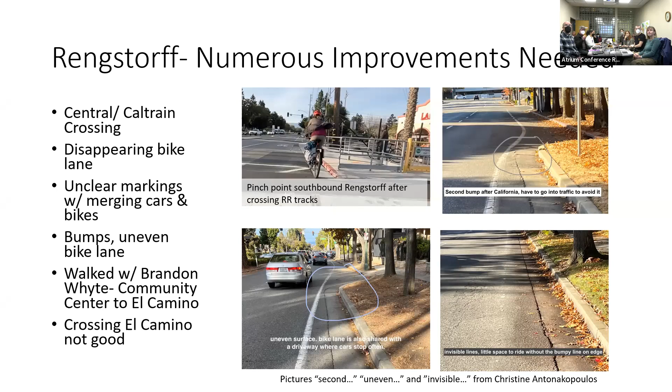Brandon was kind enough to set up a meeting with us where he walked through from the community center down to El Camino and Distel. There's a bunch of things, from the pinch point right after the railroad tracks to different kinds of surface imperfections. And the crossing at El Camino is not good. That's what we'll talk about a little bit more today.

I ride to El Camino, to Los Altos with my kids or meetings. My kids ride there most days, and I see a bunch of kids from the neighborhood riding there when I take my kids in the car.

So this is the path they take, going down, crossing over to the south sidewalk on El Camino Real on the east side of Distel Drive, which my son told me was the favored route, so people don't have to cross over Distel Drive and all the morning traffic.

There may be the 5150 development, which on the south El Camino may affect the south sidewalk, and the 2100 El Camino development may give us an opportunity, which we'll talk about in a little bit.

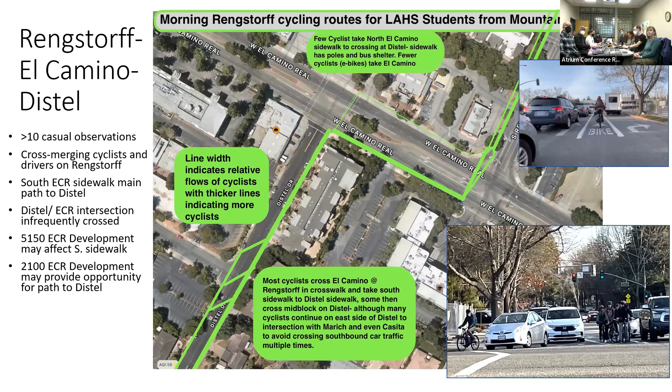After school is kind of the opposite direction, going north, except more kids in the afternoon cross over El Camino at Distel at that point because the light is quicker, according to my son.

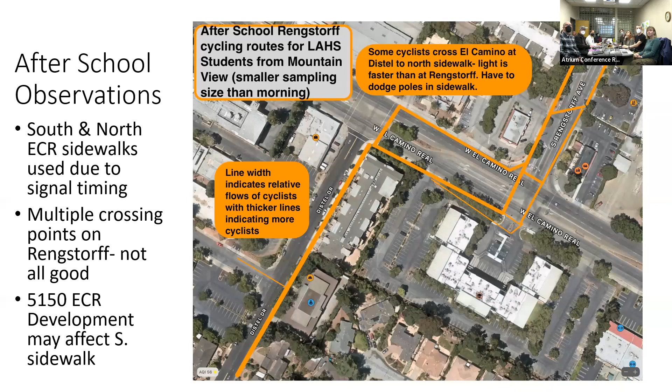So there's some upcoming opportunities and issues. The 2100 El Camino Real development may give us an opportunity to have a path around that property to go directly to Distel Drive.

So what I would like is to encourage y'all to keep your eyes out for these opportunities for improvement and continue working, and to thank you for that. So I'll turn it over now to Adit.

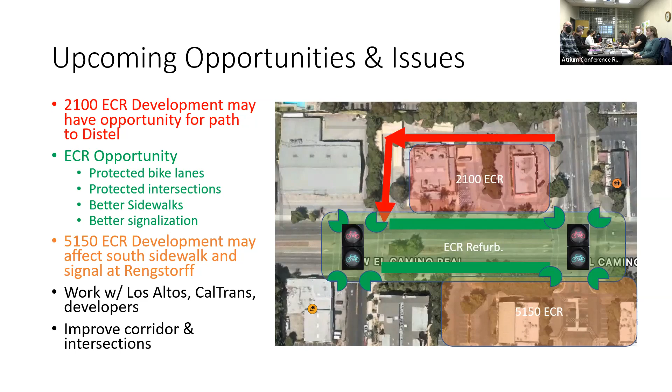And the other set of slides? Yes.

Hi, my name is Adit Chinthamadani, and I'm here on behalf of Los Altos High School Green Team, the Environmental Club, Transportation Project Group. In this presentation, I'm basically going to be expanding on John's comments.

As you can see, this is quite a big problem affecting a wide scope of students, because around half of LAHS students reside in North Mountain View. So many people are actually utilizing this El Camino and Rengstorff intersection in order to bike to school.

We conducted a student survey for Los Altos High School students who utilize this intersection. We solicited feedback from around 15 students, and essentially we had a few key findings.

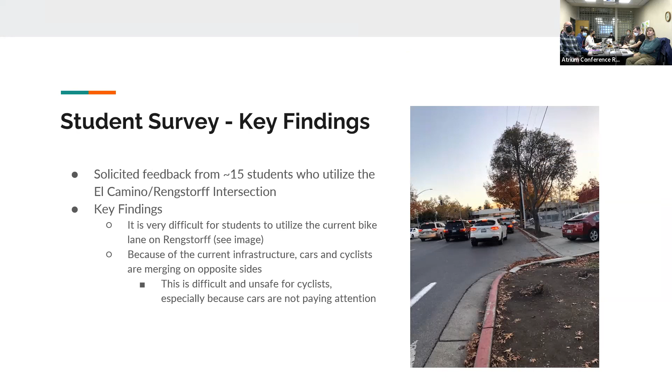Some more key findings in our survey. This is a compilation of 4 survey responses that highlight the main problems. Essentially, many of these findings echo what I've been saying. People don't really feel safe. People feel like the drivers are really not paying attention because of the current infrastructure, and people have had a few close encounters with cars.

So some suggestions echo what John was saying, in terms of adding a more distinct and wide bike lane so it's easier for cyclists to actually utilize it, or have some dividers similar to what's in front of Graham Middle School, which has some sort of stake-like dividers that divide the road and the bike lane. Those are some things that could be used to improve the experience of cyclists who utilize this bike lane.

That's just an overview from the student point of view. We'd also really appreciate some sort of alternate bike path, similar to what John outlined, that could directly access Distel, or just an improvement of current infrastructure. So thanks, thank you.

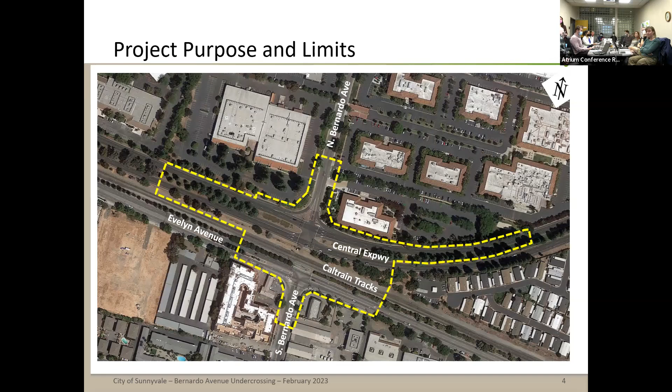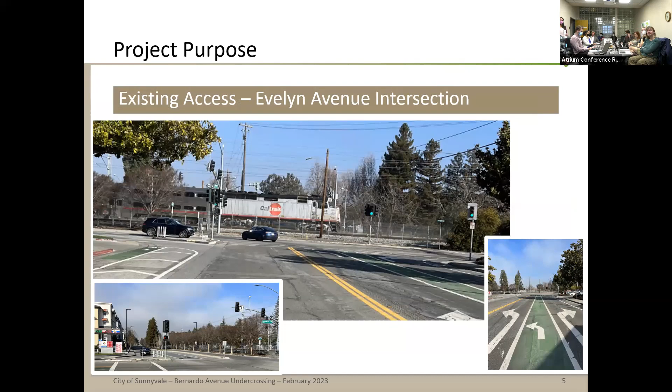So just a couple pictures here to show you what it looks like today. This is the view from South Bernardo, looking north, and you can see the train going in there - good timing on that photo. And these photos here are from North Bernardo looking south. So this is roughly where the undercrossing would connect on either side.

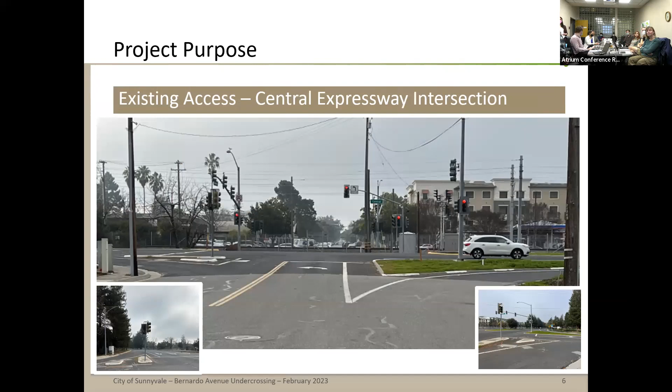So today, if you are a pedestrian or bicyclist, you have to go quite out of your way if you want to travel between the two - it's about 1.5 miles or more. It's a little farther for pedestrians because you can't walk on Central. So for a pedestrian, that's almost 30 minutes additional, and for a bicycle, that's almost 10 minutes additional. Most reasonable folks probably won't take that extra time - I think a lot of people will say, oh, I'm going to get in the car instead, which is not what we want to encourage. So that's really a main purpose for this project.

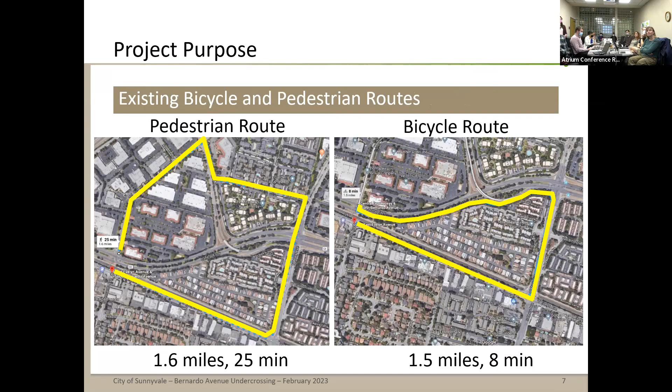So at the top of the screen, you'll see 5 different agencies are partners in this project. Being on the city limits, the southeastern corner is City of Sunnyvale, the other 3 quadrants are City of Mountain View. Right through the middle, where the Caltrain tracks are, between those orange lines, that's Caltrain right of way - it's their property, they own and operate that. And then Central Expressway is County of Santa Clara, and that little triangular piece on the side is also County of Santa Clara.

Additionally, we're partners with VTA. They've provided us with some funding, and they're also helping us with project management activities.

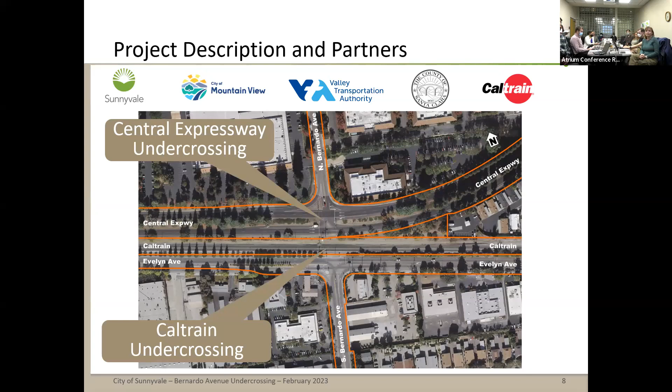So work performed to date, just to get you up to speed - we started this project in about 2018, brought in WMH, and Dave got started on the project. Cities of Sunnyvale and Mountain View signed a funding agreement, so we're equally participating in the preparation of the current scope. The current scope is looking at developing conceptual designs and environmental clearance - we're not yet at final design or construction phase, just trying to get through our environmental clearances at this point. But we do have Measure B funding that we received from VTA to help us with the final design, so we're ready to go when we get our clearance.

So as I mentioned, when the consultant team came on board, they immediately started working on some conceptual options and developed a whole broad range of different variations. In December of 2020, we had a joint BPAC meeting with both Sunnyvale and Mountain View BPACs and presented that variety, got your feedback, and brought that back to the team, starting some revisions based on that feedback.

In the meantime, Caltrain, also in 2020, started to put together their rail corridor use policy - they call it RCUP for short. We like our acronyms. They put together this policy to help inform and move projects through the Caltrain corridor and process, specifically for projects that are not rail projects. Our project, as a bike and pedestrian undercrossing, falls into that category. We went through a process with them, and the Joint Powers Board of Caltrain approved a use variance, which means they will allow us to move forward with our project and help us with the project administration.

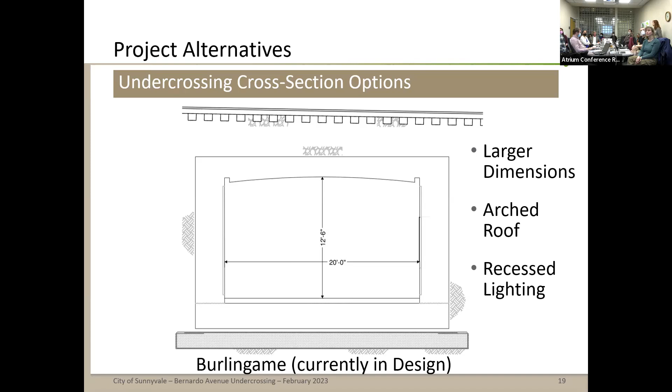Next slide, please. I wanted to run through a few of these other undercrossings, some of the feedback we received, and some of the concepts we're contemplating integrating into this project, along with dimensions on those undercrossings.

It also has light inside, which could be because of the arched roof. I wanted to point out that if you're familiar with this station, this is very similar to the length of the Bernardo undercrossing, and also midway it has some natural light in there. So it's also kind of very similar to the proposed eastern Bernardo undercrossing concept.

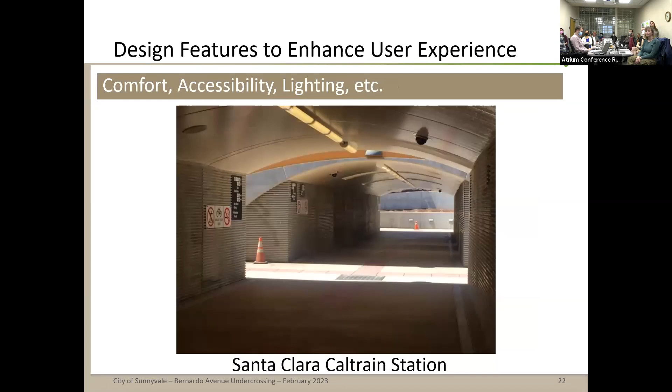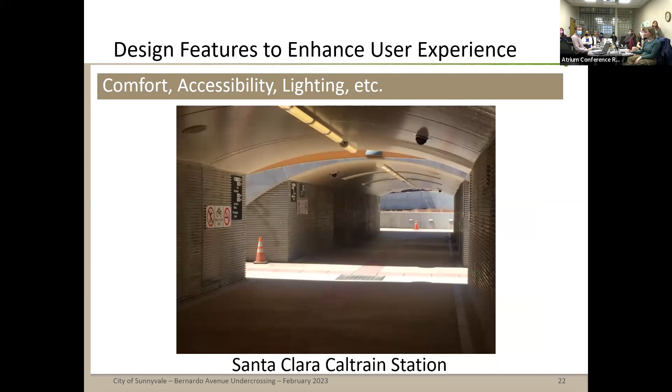Next slide, please. This is what it looks like on the inside. In fact, the opening on the Bernardo eastern alternative is even larger than that. But again, you get a nice feel. You don't feel as much like you're in a big, long tunnel, if you will.

Next slide, please. Lastly for this one, just things that we think would help the experience, like you can see the mirrors in there. Another thing about this undercrossing that's sort of similar to Bernardo is we have those ramps coming in at right angles. It's very hard to see around that corner. So at a minimum, we're going to likely want to have some mirrors in there and some things so you can see if a cyclist is coming from around the corner. Those are other things that we'll be looking at.

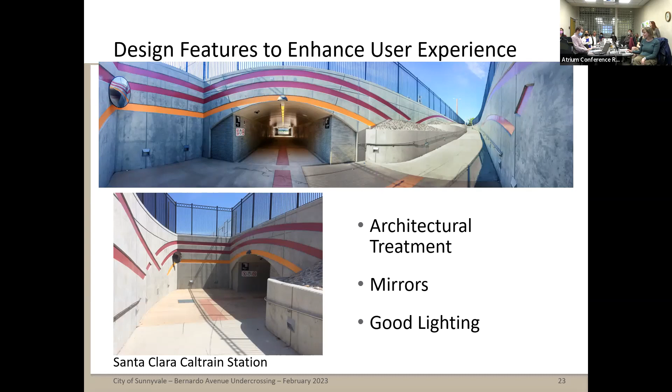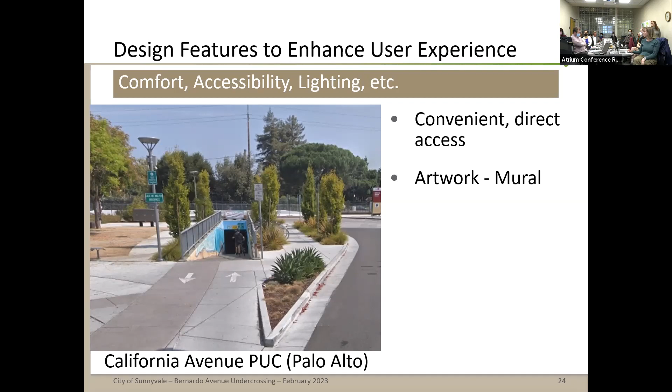Next slide, please. But they absolutely love the mural and things you can do to make it feel better when you're traveling through these. Next, please.

Here's Homer Avenue in Palo Alto. This undercrossing is 18 feet wide and 8 feet 3 inches tall. People do like it because it's wide and it's got good lighting. They also like the separation of bicycles and pedestrians in this, which is something that we're thinking about as well.

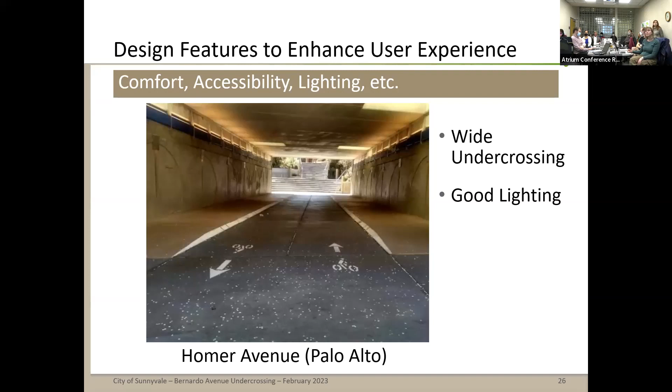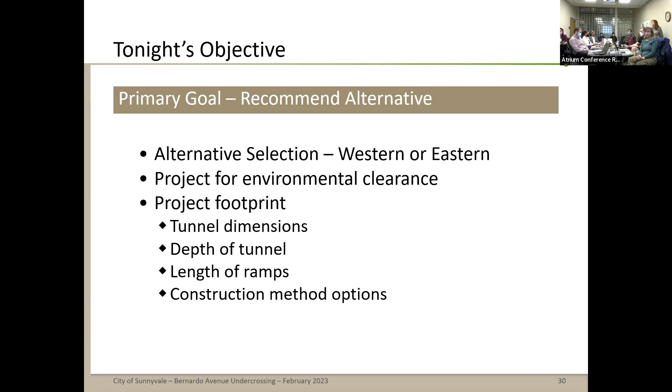So where do we go from here? As I mentioned, we went to the community at the beginning of the month. We're here tonight with you. In March, we will be giving the same presentation to the Sunnyvale BPAC, getting their feedback and their recommendation to councils. Then in late March and early April, or mid-April, we will be coming back to Mountain View.

To the Council Transportation Committee with a public hearing item and asking them to make an action. That action will then be forwarded on to the full city council. And finally, in May, we will be going to the Sunnyvale City Council and getting their action as well. So the hope is by May, we will have a recommendation, we'll move forward, and Dave and his team can finish up the environmental clearance.

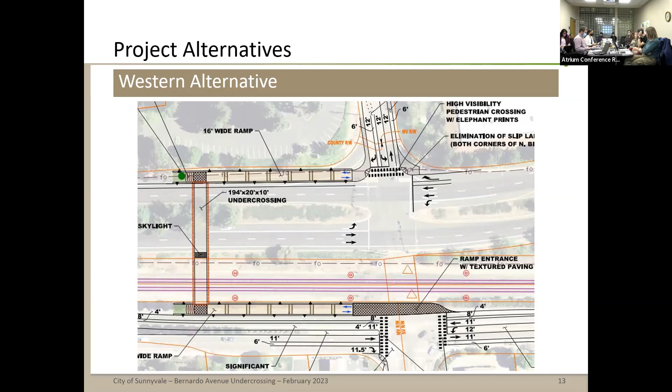Great, so that answers my question - that project is going forward regardless of what happens here. Yes. Okay, great. And then my other question is, when we talked about those bonus ramps into Central Expressway, do you know what the speed limit is around there?

I think it's 55, I think it's 50, it's at least 50 here. Okay, thank you. Some places it varies, it's 35, 45, 55. Yeah, I actually just came up here on Central Expressway this evening and drove through here, and I'm pretty sure it's 50 here. And this is the last intersection right before Mary Avenue, correct? Which has got a lot of other ramps as well.

So, one additional question. I didn't see any data about the current or expected residents and employees at each quadrant, as it were, the flow estimates of who might use it, what direction would be coming from south along Bernardo in the morning or afternoon on each crossing. Do we have any information about that?

So we started this project before those other projects, I believe, had developed any projections. I'm not sure how it all worked together, but I guess within a 2 or 3 mile radius there's tens of thousands of residents. I can get the number, but the East Whisman Precise Plan plans for large increases in employment and also housing in this area. I guess I was trying to understand what morning and afternoon flows might look like and favor one configuration over the other.

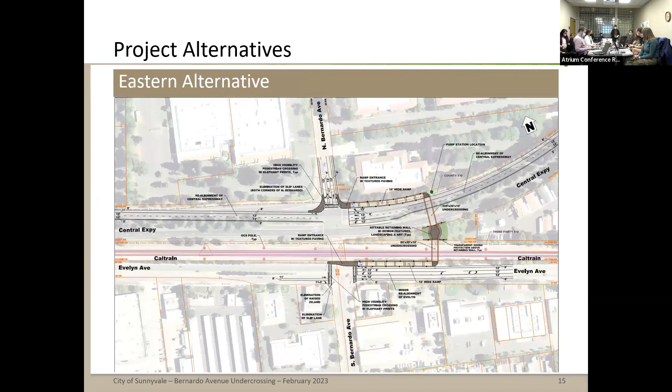And I think the one that you showed at Santa Clara, with the more arch-like roof, feels more sturdy to me, more welcoming, and yeah, wide, light arch on each side. Sounds good, thanks. Thank you.

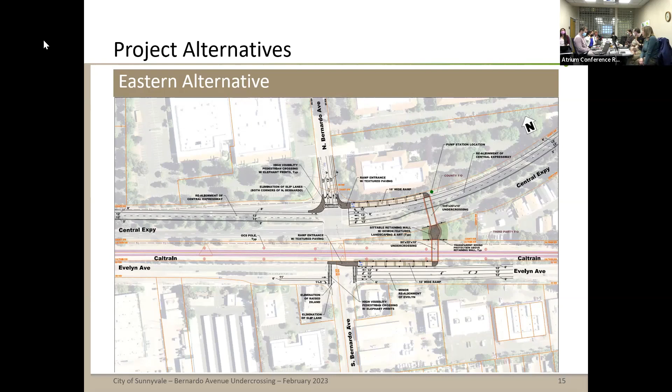Like multiple other members, I have trouble expressing a strong preference about Eastern versus Western. I have a slight preference for Eastern basically because I saw the exact same thing that Isaac did. I actually currently commute to an office on California Avenue in Sunnyvale, and being able to cross the train tracks at this location instead of crossing at Mary would be much safer, even though I don't need to cross Central Expressway. And so if there were through access through the mobile home park to California Avenue and crossing Mary at California Avenue, that would be nice. But that's sort of a long-term view. That slightly tips the scale in favor of Eastern for me, along with I do like having the light. And if the two projects are comparable costs with comparable timelines, then only small things are tipping the scales.

With regards to bike access to eastbound Central Expressway, I'm not a huge fan of the reasons being listed for not doing it, because I think long-term we should be asking how can we make Central Expressway a more useful bicycle corridor, rather than saying it's not useful right now so we shouldn't do anything. However, I don't think it serves very many trips to do that, and it looks like a somewhat expensive addition, although maybe not horrendously expensive. So it doesn't seem like that high of a priority to me, and I'm perfectly happy preserving that funding and political will for other battles.

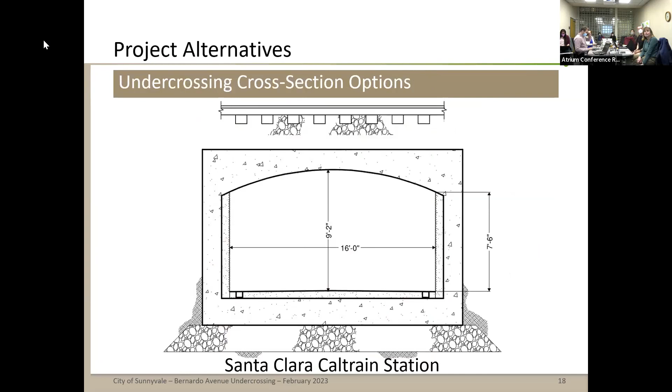In the meantime, any other comments? Member Fenwick? So can we go back to the photo diagram? I think your first slide before all the alternatives. Before the alternative. This one, yes. Okay.

I think we're seeing the mobile home park and all the one or two story buildings. So the question is, is there a process to look at enhanced alternatives that might capture right-of-way during development and log that, whether it's ten years down the road or whatever, that those buildings get torn down and parking lots developed? So the property on the northeast side is going through a development process right now, and that building is staying as part of it. They have a transfer of development rights agreement with the school district, so that building at the corner there is staying.

But in general, I guess the question is, how do we account for alternatives where, let's say, this project feeding into the tunnel or adding a second tunnel could benefit from right-of-way access on developments in the area—both to suggest options as we look at the design, and to remember to negotiate it when it comes up. I think that the design that comes out of this is what we would use to require or request things from developers. So if it's not in the design, then we don't have a basis for it.

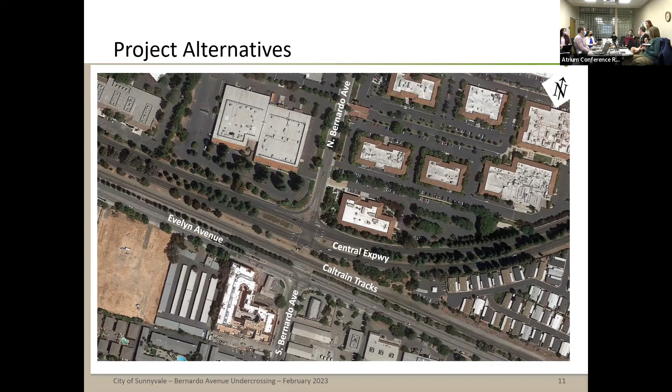Since we're already a bit behind where we intended to be, I think a motion would be in order for our preferred alternative. We need a motion? Please. I would like to move that we go forward with the eastern alternative as presented at BPAC. Second that motion.

Roll call vote, or just ask everyone to raise their hands? Yeah, I guess we can do that. Okay, all in favor? Aye. Aye. All opposed? Any abstaining? All right, that was 4 in favor with member Dominic abstaining.

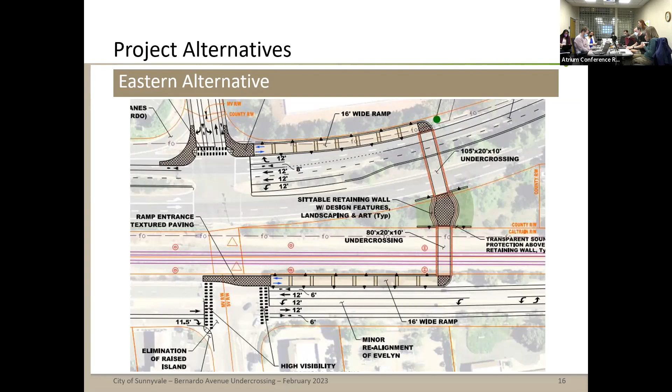Okay, we will now move to item 6.3, our Vision Zero Action Plan and Local Road Safety Plan. And I believe we get to hear from a repeat presenter.

Tracy, you're going to share from your computer? Thank you. Thank you for joining us. Have a safe drive home. Yes, nice to meet you too. If you want to stay over there, Tracy, I think it would be okay, but you can come here too. If I could come over there. You got it. One more.

Where are these pastries from? They're from the Midwife and the Baker, my favorite bakery. Usually I can't get there in time, but I got them before work today. What's in them? These ones are vegan cookies, and then that's an everything croissant.

And Corinna is on the line. For this item, the project manager is Priyoti Ahmed, one of our transportation planners. Unfortunately he's sick tonight, so Tracy has offered to do the presentation for this one as well. My colleague Corinna is also on the line for the public comment and questions period in case we need her to provide input.

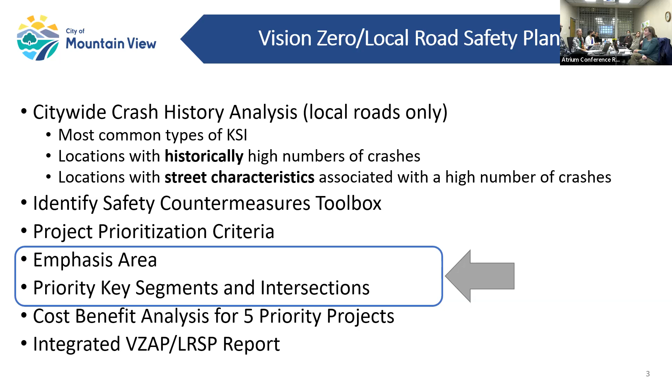As a reminder, this project started with a crash history analysis. Because the project started in 2020, the data we looked at was from 2014 to 2019. As someone noted in a question prior to the meeting, that does not include crashes or incidents that have occurred from 2020 through today. Some of that information wouldn't be available in the data set we'd be pulling from, but we started the project a couple of years ago.

The total number of crashes from 2014 to 2019 was just over 1,200, with 77 of those being fatal and severe injury crashes. One important thing to note: looking at the data by mode, there's a disproportionate representation of bicycle and pedestrian injury crashes, particularly in relation to their proportion of mode share within the street.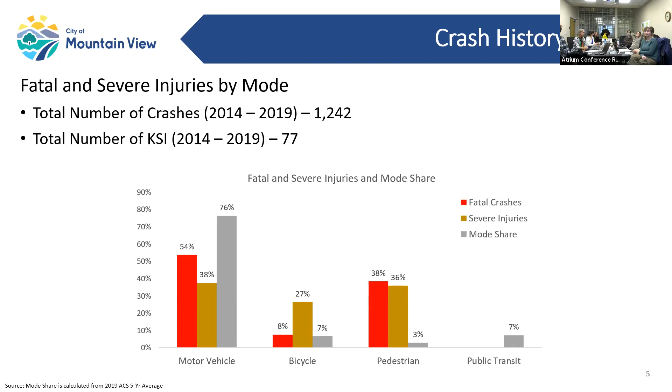Some other findings from the crash analysis: we saw higher fatal and severe injury collisions at street segments that are 35 miles an hour or above. This represents approximately 20% of Mountain View streets, but they account for 73% of fatal and severe injury crashes. We also noted fatal and severe injury crashes occurring at intersections of 25 mile per hour streets with those 35 mile per hour streets, and it's important to note the collinearity between posted speed limit and other roadway factors. We also noted a large number of crashes occurring in commercial areas and precise plan areas.

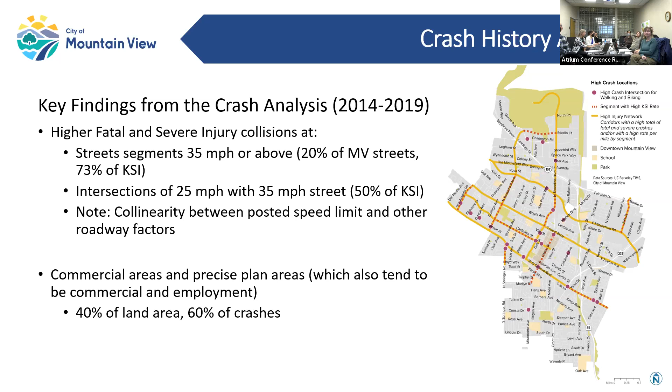Based on what we saw in the crash history, roadway characteristics, and crash types, we developed this countermeasure toolbox using recommended proven safety countermeasures from FHWA and Caltrans, pulling from research and documentation. Proven safety countermeasures identified by those agencies are important when putting forth projects for funding. Typically these countermeasures fall under pedestrian improvements, bicycle improvements, and other multimodal improvements, and they are effective at helping improve safety for those different modes.

For pedestrian improvements, we considered leading pedestrian intervals, protected left turns, high visibility crosswalks, curb extensions, mid-block crossing islands, RRFBs, and access management. Again, a similar slate of countermeasures, and many of these are already in use in Mountain View and the Bay Area, which was also an important feature.

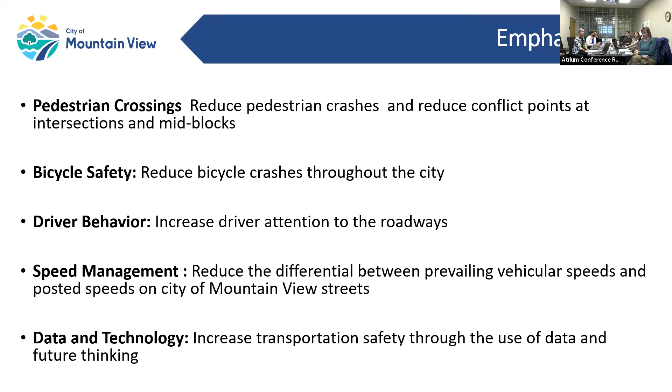Looking at speed management approaches, and then a focus on data and technology, increasing transportation safety through the use of data and future thinking—partly identifying where we're missing data, and whether there are technologies we can get or support to improve safety going forward. These emphasis areas in the crash history also help inform the prioritization criteria used to rank and prioritize the projects. Top of mind and the highest priority was a focus on reducing the severity of crashes.

Next was again this idea of looking at the equity component, looking at income and the vulnerable road users affected in crashes, proximity to key destinations in terms of where the crash locations are, or the road characteristics that may be associated with the risk of a crash. We applied those three elements in the first layer of the prioritization criteria, and then when we move into the more final stages of prioritization, we look at proven effectiveness and implementation, coming down to a final list of 5 projects that we'll put the cost analysis together for as part of this plan.

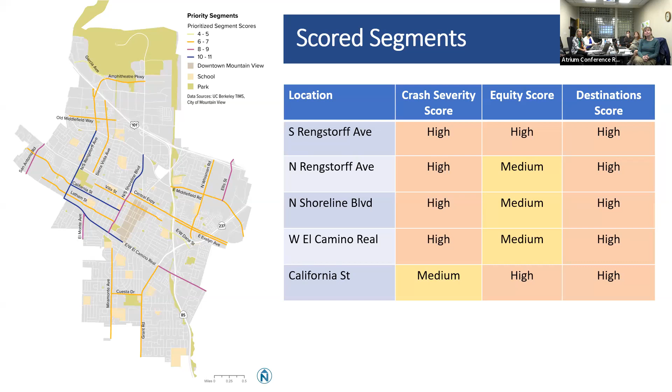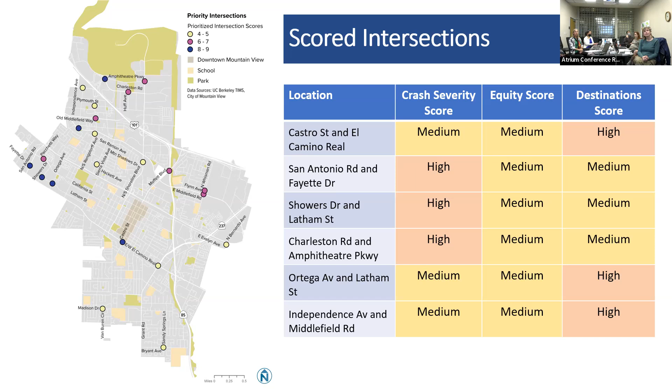When we look at the intersections that had crash history or characteristics associated with crashes, again looking at these top 3 scoring prioritization criteria, we're looking at 6 intersections, and 3 scored high and 3 scored medium in terms of crash severity. They all scored medium on the equity score, and again an even split between high and medium for the destination scores.

So again, our early list included more key segments than was on that shorter table we just went through. One of the things we looked at was what projects are already planned and scheduled within the city's CIP. So while some of these projects did score high, if there are things already underway, they were pulled off the list. They're already in a plan and they are moving forward.

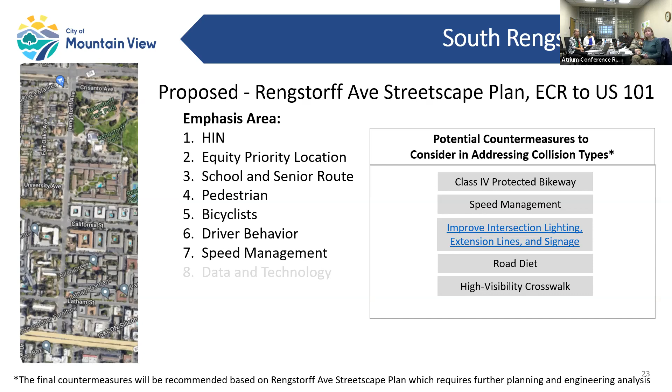The countermeasure list again focuses on infrastructure changes, but as I mentioned earlier, one of the key items about the emphasis areas is it also allows us the opportunity to look at non-infrastructure programmatic elements. So some potential countermeasures to address the collision types seen in this section of Rengstorff: Class 4 protected bikeway, speed management, opportunities to improve intersection lighting, extension lines and signage, consideration of a road diet, and high visibility crosswalk.

When we look at North Rengstorff Avenue, again, very similar in terms of the list of potential countermeasures that would address the collision types we're seeing along this section of the roadway.

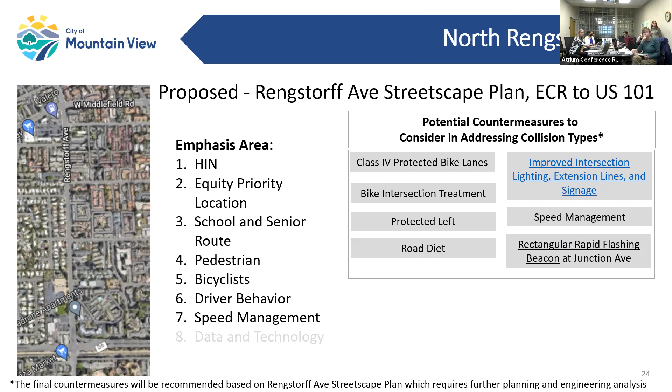And then again, along another section of North Rengstorff Avenue: improvements in crosswalks, bike infrastructure, and awareness of crossings for pedestrians, and then the potential opportunity for a road diet.

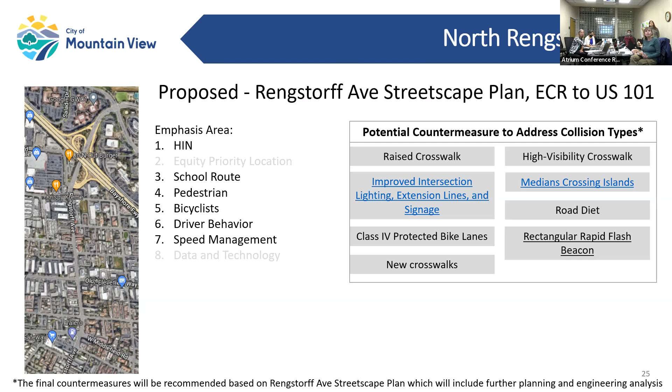San Antonio Complete Streets is another potential segment project to be considered moving forward in this plan. It also has a range of potential countermeasures that could be applied to address the collision types we're seeing, or address the roadway characteristics that occur on this segment.

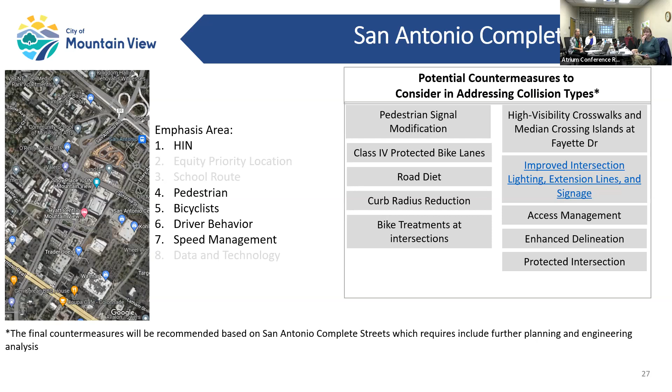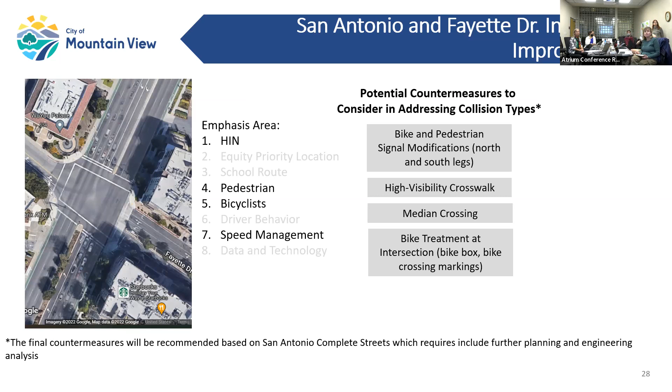We have a number of intersections that came to the top of the list that could be considered as intersection projects, to move forward towards a more concept-level plan and cost estimation to be included in the plan. San Antonio and Fayette Drive intersection improvements could include bike and pedestrian signal modifications on the north and south legs, a high visibility crosswalk, a median crossing, and potentially bike treatments at the intersection.

At California Street and Pacchetti, we could consider pedestrian signal modifications, high visibility crosswalks, a median crossing on California, looking at some curb radius reduction because of the greater curb radii, and an opportunity for some bike signal phasing and treatment at the intersection.

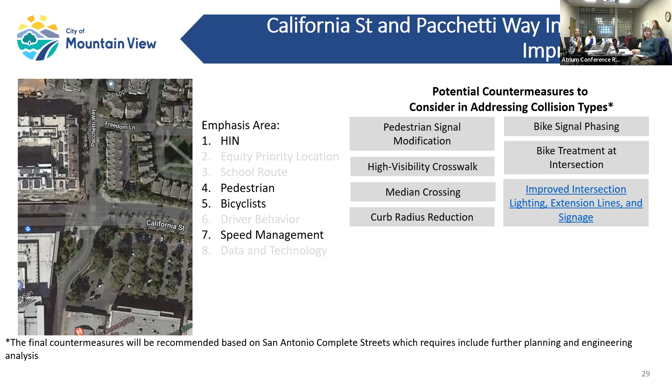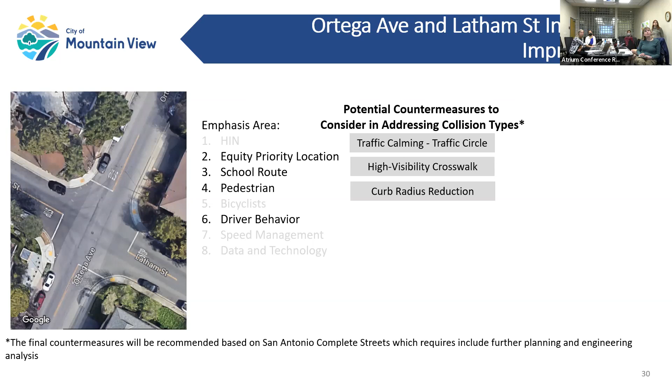Looking at Ortega and Latham intersection improvements, there could be an opportunity for traffic calming or a traffic circle, increasing the visibility of the crosswalks, and again those are some pretty wide curbs, so can we tighten those up to reduce the speed at which vehicles could take those corners?

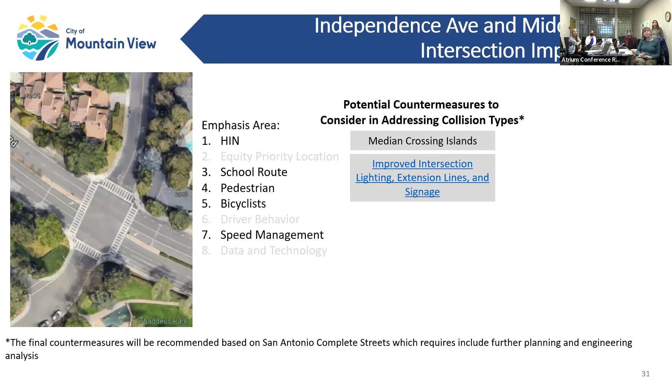And then Independence Avenue and Middlefield Road could consider some median crossing islands, and then improve intersection lighting, extension lines, and signage.

So those are all design approaches that could be applied to both segments and intersections. There are also potential operational improvements that could be considered to be applied in locations or systemically throughout the city. One of the things we've talked about is reducing the approaching speed and increasing visibility.

We could look at no right turn on red, leading pedestrian intervals, wayfinding signage, and then there are also opportunities in the California Vehicle Code and California MUTCD in terms of locations where the speed limits can be reduced.

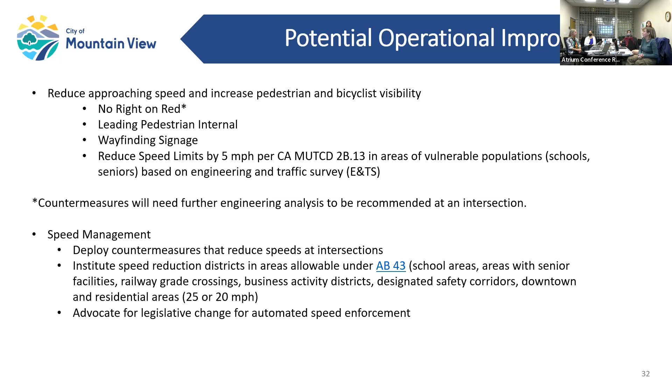Related to speed management, there are opportunities to apply countermeasures that reduce speeds at intersections, and what is available in terms of using changes in state law to potentially have speed reduction districts considered in various places around the city. There are always things happening at the state level in terms of legislative change. Automated speed enforcement is something that comes up often for consideration, and that is something that could be advocated for at the state level as well, to allow agencies the opportunity to utilize that tool.

So our next steps: we presented this analysis to the Vision Zero Working Group about a week and a half ago, and we're here presenting to you tonight. Community outreach will be done in March, and then our intention is that the plan will go to CTC.

So for all of you, the discussion questions for this evening: does BPAC concur with the prioritized key segments and intersections, and do you have input on the proposed project descriptions that were included in them? And that's it. Thank you.

Thank you. Questions? Member Fenwick. I have a clarifying question, I sent it, but I'm not really sure.

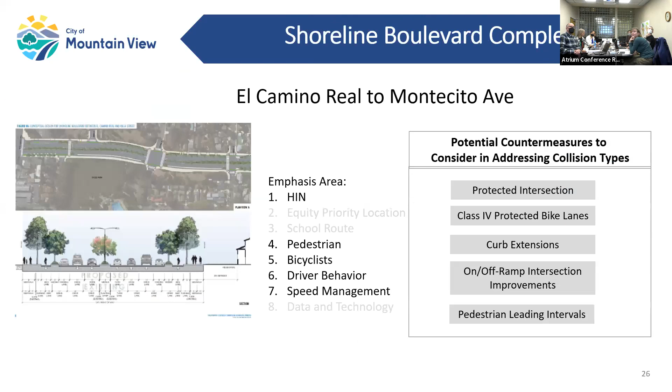That was a response to a question you submitted. Sorry, maybe Priyati had already provided that. Moffett and Central Expressway. Yes, so we have a planned project to do a signal improvement at that location, including conversion to an 8-phase signal. Okay.

Additional questions? Okay, I guess I will move to public comment for this item, but seeing no members of the public present, we will continue on to member comments, and if you could put up the two discussion items, I think that would help.

Would anyone like to begin? A lot, but. Vice Chair Stone. So I want to talk for a little bit about a few specific projects. First off, I want to say that I really like the report. I think it's very good, and the identification of Rengstorff as a priority is something I agree with, and we've heard another potential reason to favor that. So my first comment is that

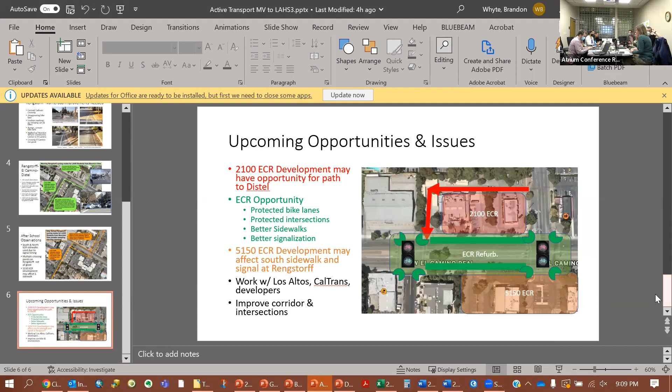Overall, I think I like the analysis and the plan. I agree on Rengstorff. It's a street I would find myself on every once in a while because I have to cross the tracks, and I'd think, oh my gosh, what is this? I'd maybe file an Ask Mountain View ticket and decide not to go back. Then it turned out lots of school kids are using it. I couldn't believe it. That seems like a definite priority.

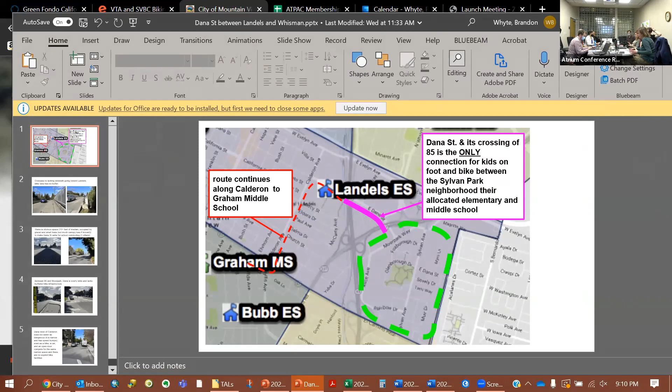I had thought about Old Middlefield, because I'm seeing Shoreline getting a lot of attention, and I'm like, well, that stretch from El Camino to Montecito has already been treated. So we're going back and doing more on Shoreline—do we really need to? Then I looked at the nice new map with collisions from 2019 or 2018 to today, and they're still happening on Shoreline. So okay, maybe we should go back and do more there because that's where the collisions are.

But as Member Stone mentioned, not in this meeting but a previous one when we looked at collision data, we don't really have the denominator. So on Old Middlefield, maybe not much is happening there, but there's no bike infrastructure. Do we weigh more heavily on roads where people currently are, maybe because we have inferior bike infrastructure but at least there's something, so you find people there, and we want to make that better? Or do we want to address places like Old Middlefield where there's really nothing, where you wouldn't even go?

Maybe this segues into Dana Street, which didn't make it into the top 5, but I wanted to make a pitch for it. In green is the Sylvan Park neighborhood, allocated to Landels for elementary and Graham for middle school. On Dana Street, kids have to cross 237 and 85—it's the only way. My son used to go to Landels, and I talked with other parents; they would just drive, even though it would be a relatively straightforward walk or bike, because you don't want to do that on the sidewalk with elementary school kids.

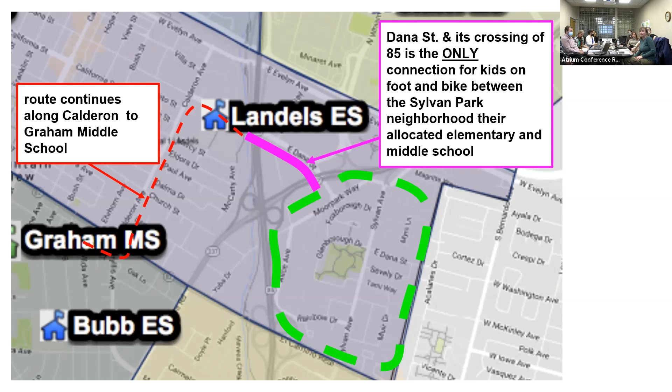I know a kid who did do that with his parents, and now he's biking to Graham, fortunately using the Calderon part. But again, with Dana Street, I think their hangout time is impeded because I'm not confident sending my son across Dana to get to the Sylvan Park neighborhood. So there's a missing connection, and even though fortunately we haven't seen many injuries there, I think it's a very strong missing link. Maybe next slide.

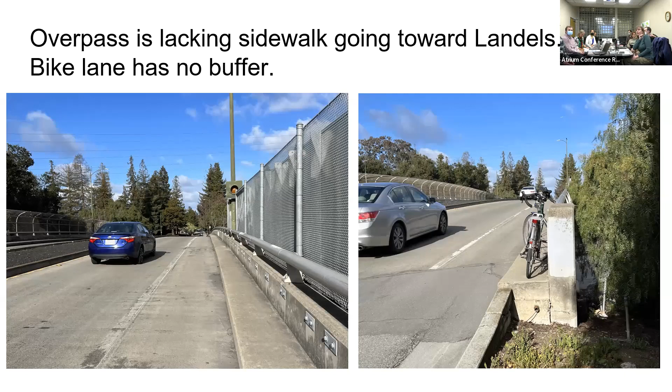So this is going toward Landels from the Sylvan Park neighborhood. There's no sidewalk on that side, and there's no buffer in the bike lane. So I think that families would not feel comfortable going there. Next slide. But maybe I'm missing something. There seems to be a huge opportunity in terms of just nothingness, like this super wide median. I don't know how wide it is. I think it's at least 10 feet. And then at the end, you have some smaller trees, so I think it wouldn't be a big loss of canopy. And while I was there taking photos this morning, there were a bunch of bikes going. I wasn't there during school commute time.

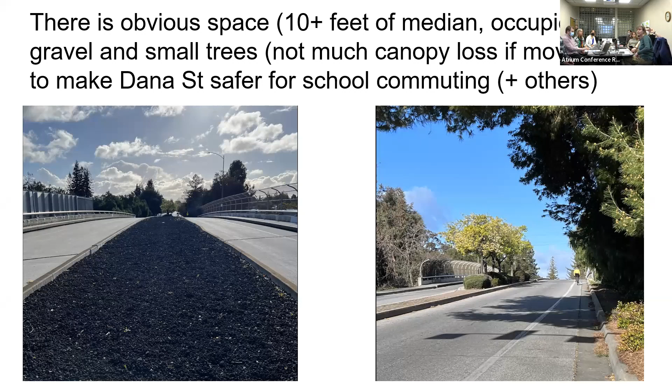Next slide. And then the next section, I think, is also a great candidate because it's just a wide road. The speed limit is, I don't know, cars tend to drive pretty fast because it's pretty wide. And then there's that weird thing where there's a very skinny bike lane next to a skinny lane, so you're kind of pressed against the cars.

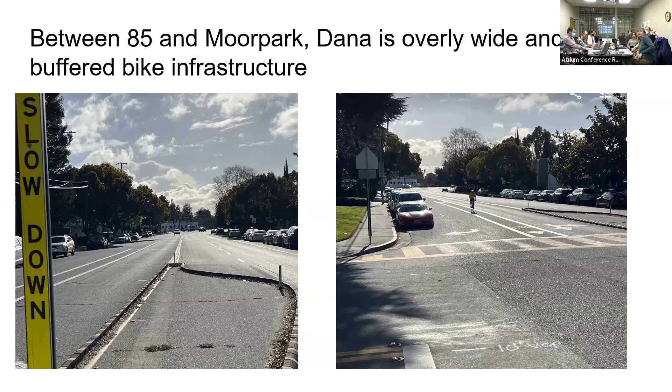Oh, I had more to say. Okay, and then this is just a contrast with Dana further, where it's like, oh my gosh, there's a person opening their van door, there's a car, there's a bike, and they're all supposed to be in the same space. But because the street is narrow and there's speed bumps and so on, I wasn't thinking something bad's gonna happen. So for some of the other projects, I'm not as sure about what needs to happen, and I guess I'm not an engineer, but it seems like for Dana Street, there's a lot of opportunity there to connect kids with their school and with their friends.

Yeah, that's it. And then, sorry, I had notes. I have one more to see.

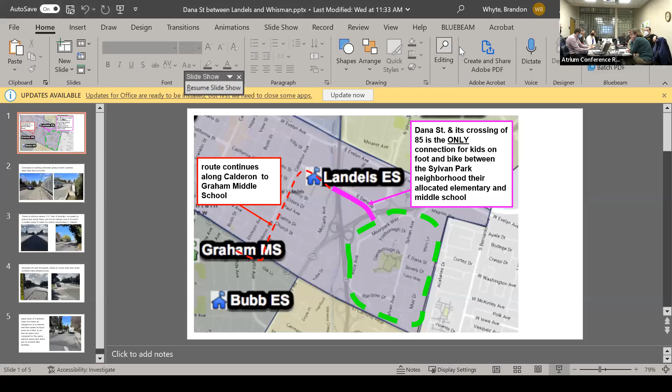Okay, oh, Independence. Yeah, it seems like those improvements will help pedestrians. I'm not sure how they would help bikes. I used to drive to a car shop, have my bike in the car, and then go back by bike. That left turn from Independence onto Middlefield going towards Rengstorff, I mean, there's never any traffic, so I guess it wasn't that scary, but it seems like the improvements are maybe half measures. Like what would be really nice would be to have a signal. I know that's like $1 million, but if one could have a beg button and a light and cross, you know, because we're saying we're gonna have a refuge for the pedestrians, and already there's a lot of paint and signs.

Independence and Middlefield, right? Yes, Middlefield, sorry. So we could put a place for pedestrians to take refuge, which I think is great, but if it's really an important intersection, then I think it would be nice to have the signal.

But overall, all of those projects and intersections seem very, very worthy. And I have been noticing around town the lead pedestrian intervals popping up all over the place, and I think that's great. Thanks.

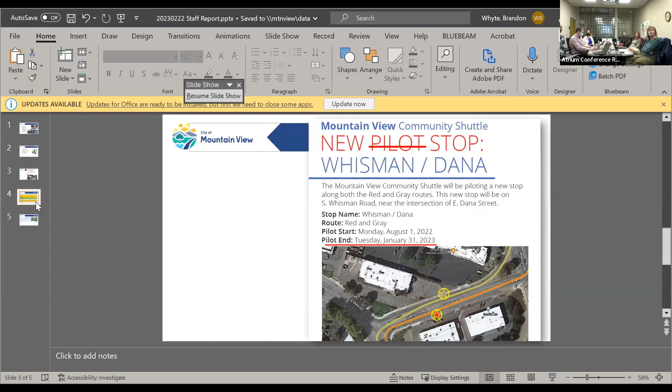And I will talk about our Ask MVs. We have November data. We're still processing December and January — February would be too soon. We have our November data here, and normally I have two monitors, so you're going to get to see my notes. I want to give you guys the highlights from that November data.

We had a request to remove the bike lane on La Avenida due to a lack of parking near the post office — this was from a post office worker. The Postmaster General also requested assistance to find more parking, not specifically asking to remove the bike lane, but along the same line.

On Ortega, RVs are blocking the entire area, and there's a request for a bike lane so that RVs would not be able to park there. There are also cars parking in the bike lane on Calderon. And then a suggestion to stagger school times to reduce traffic and conflict around schools.

From the numbers perspective, this is Ortega — that's item 22, Ortega. Everything else is pretty similar to what we normally get. No near misses were reported in November, so I think that is good.

And then when it comes to Castro, we had one concern and one question or request. The concern is that the light at Castro and Mercy is too short to get across. And then there was a request for tables not just for restaurants, but for general use. That is the staff report.